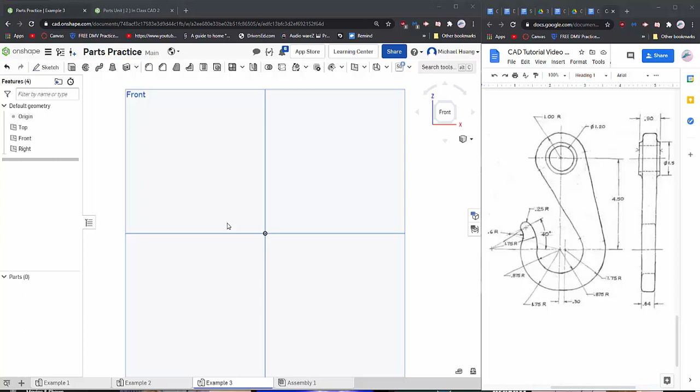Alright, let's try to figure out how to make this little hook shape. It's a bit difficult, but it's definitely doable.

So with every sketch, you think up a game plan. Alright, and as I'm looking at this model, I think I'm going to make a sketch of the side profile here, and then extrude it outwards, and then the little extra details will finish it at the end.

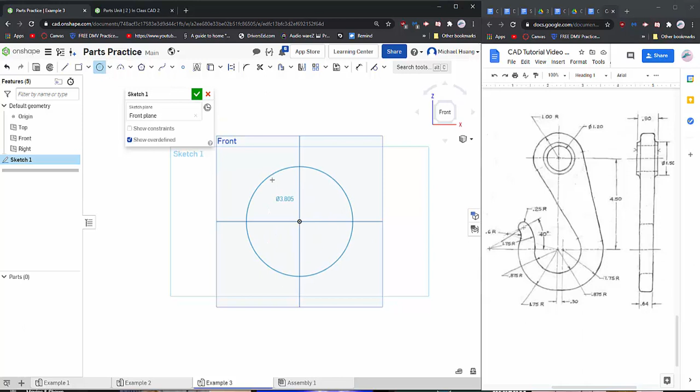Alright, so I'm going to start on the top circles here, because there are other circles down here, reference circles that are reliant on this top circle, so 2. Make this 1.2.

My lines are here. Gonna tangent them. Okay, and you'll see down here, this 4.5. Down here there are arcs that essentially follow the path of these circles. So you can imagine every one of these plus signs as its own reference circle, right? They don't exist, but these arcs are reliant on them.

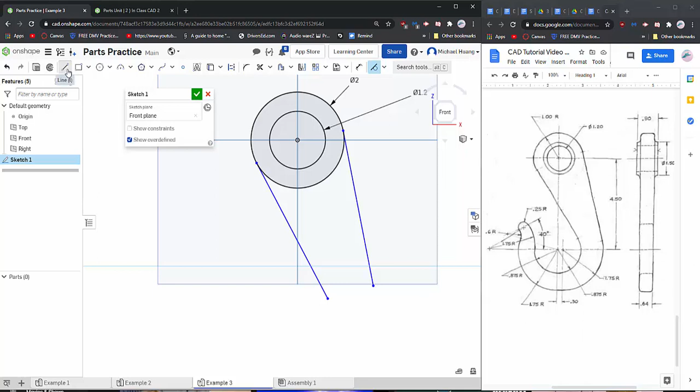So I'm going to make this line, just for reference, make this construction, because it's a reference circle, and then do the 4.5.

And you'll see that on the side here, this is a circle to the right of this one here that I've selected, right? And it's 1.75, and it's 0.3 to the right. So we're going to do that, but first, the circle I have right here is going to be 0.875 times 2.

Okay, and then we're going to draw the line. Make that construction, and then the circle. This guy is going to be 3.5, 1.75 times 2.

And then we're going to connect these lines, tangent them. Looks like I'll need this reference line later on because this little bottom portion is flat, so that's that. Alright, so let's draw the arc. It's up until here. I'm making this arc coincident so that it follows the path of this reference circle. That way it neatly defines all of it.

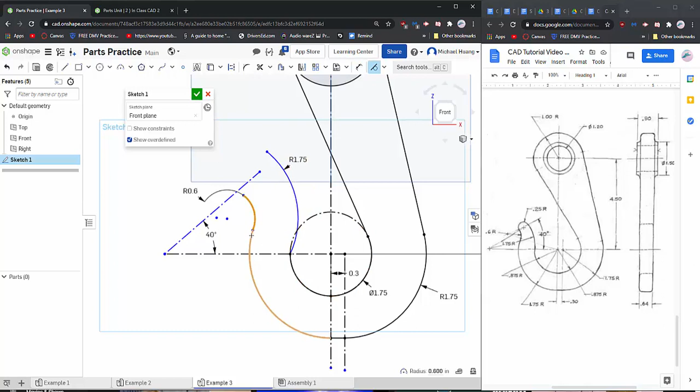Okay, tangent, tangent. Can I delete the circle? What will happen? Yes, I need to define this as 0.75. There we go. And then tangent this. Tangent these two. There we go. So okay, 0.6, 0.6.

So I know that the radius of this little arc here is 0.25, right? So that means that my distance between these two dots is 0.5. So I can do that. Dimension them like this.

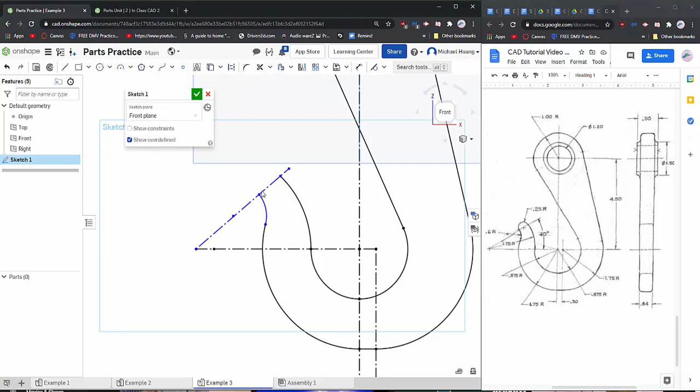Okay, we'll see, this looks a little bit wrong, but we'll see. 0.5, there we go. Oops. There we go, and that should be good.

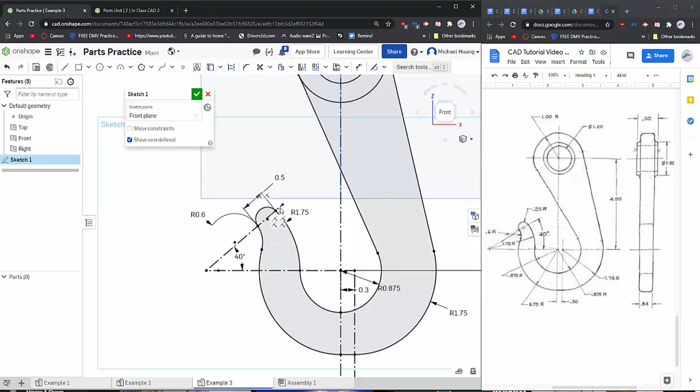Alright, so the important thing with this one is you have to make sure to tangent all of your arcs correctly, right? Alright, a little bit complicated.

Okay, so let's tackle the 3D extrusions. We can go through it, just make it like this. Distance, just making the base so it's 0.64.

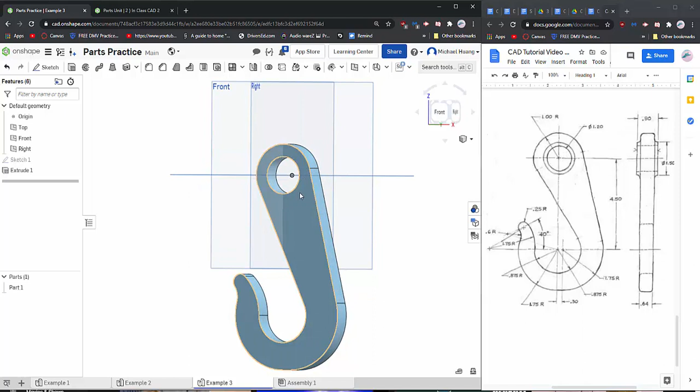So we have to make this sort of little extrusion here, so you can see if I move over, there's a sort of little extra extrusion that goes there. So what we can do is, I'm actually going to make a plane, make a midplane. Sketch on this midplane.

And then what I can do is I can make this outer lip. You see this middle circle from the side view. That circle is 1.5 diameter. Okay.

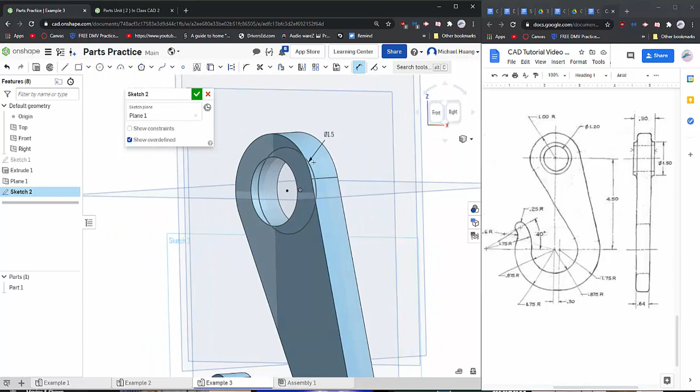The distance between the extrusions is 0.9. So okay, actually, you know what? I'll need to make the center circle again as well.

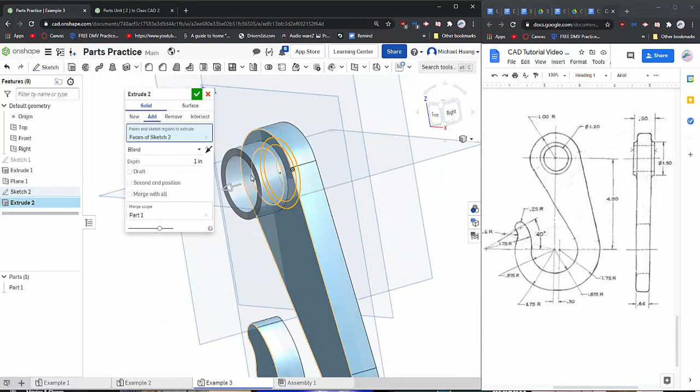Okay, I should be able to now extrude this guy symmetrically, and that's why I made the midplane there, so I could extrude both ways and just so I don't have to make a sketch twice and just, you know, make it twice. Simplifies things. And this is 0.9.

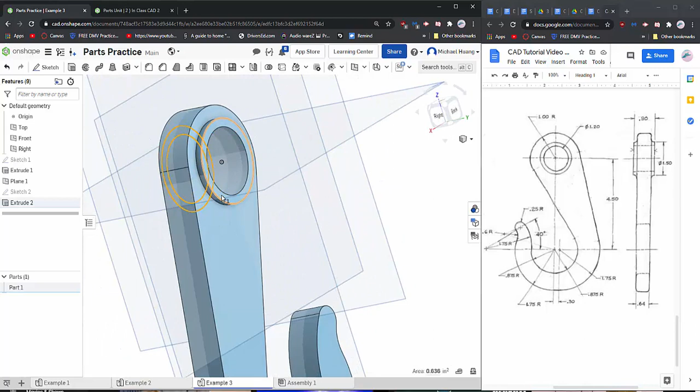I think we're done. We'll just check here to here. Down here you'll see it's 0.9, which is what I want. Alright, and that is how to make your hook.

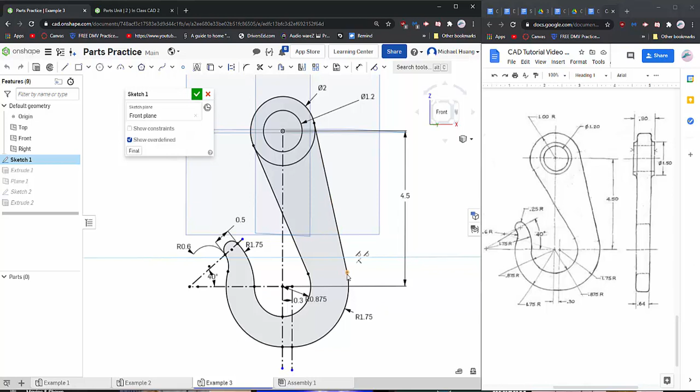A little more involved, just, you know, most of the work is in the sketch. Make sure you can understand how to understand that you'll need to make reference circles for this type of object, and that the arcs follow the reference circles and they're tangented to each other.